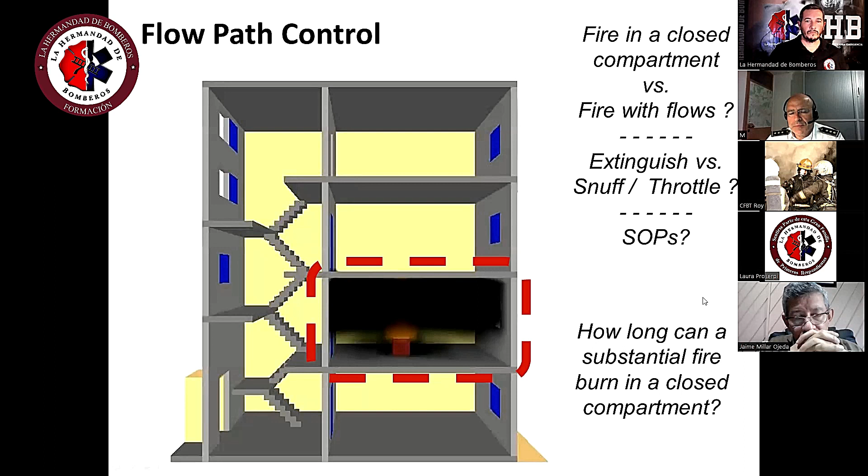And this compartmentation might be broken if maybe windows break or windows are open, or if doors, for example, to the staircase is opened.

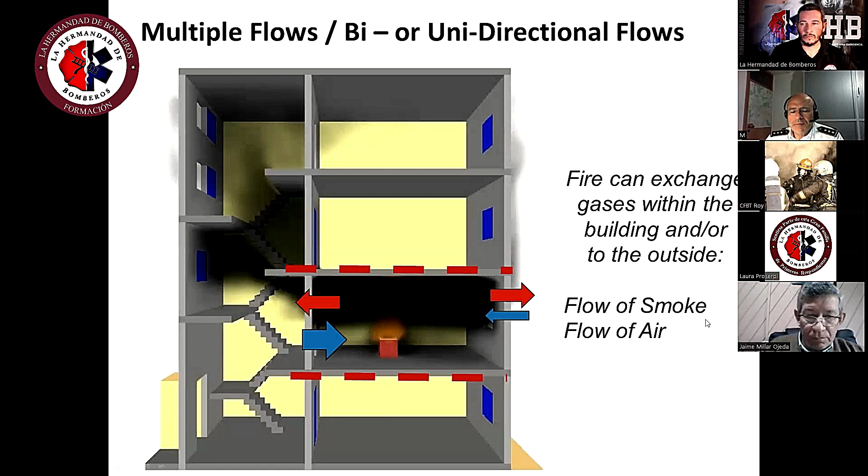So for Germany, we have a lot of key sentences, but the most important thing is the stairway is the most important room in the building, and you always should try to stabilize the situation when you arrive on scene as the fire service against sudden changes, like failure of the window or a flashover or a wind situation. All these fast changes make the situation worse.

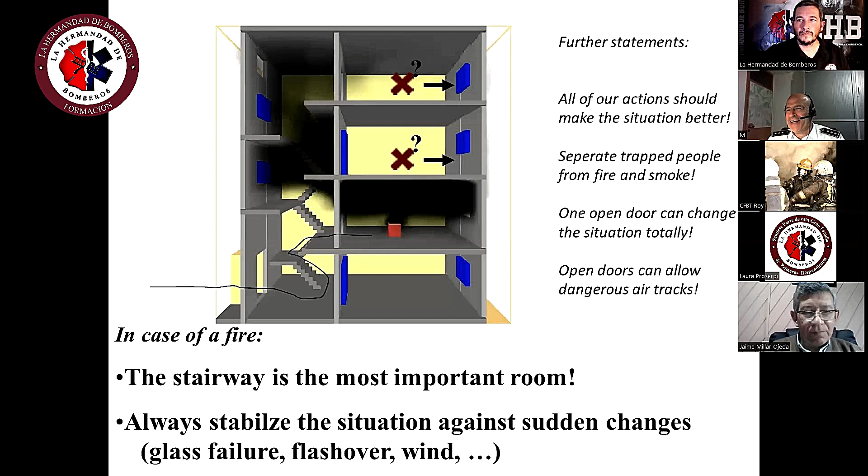I'm just having trouble with my Spanish. Yes, okay. Compartimentación. I got it also.

Yeah, good. Okay, so like a sentence you might hear quite often, the stairway is the most important room in a building, but nevertheless, if you look what fire service is doing all around the world, we have to get access, we have to stretch hoses, we break into doors, and we destroy compartmentation.

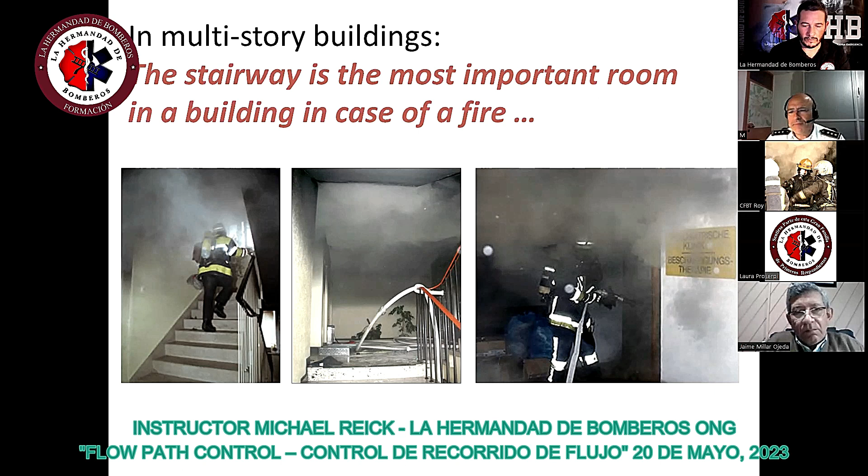So about 20 years ago, I spent a couple of months and did only calculations about smoke spread in multi-story buildings.

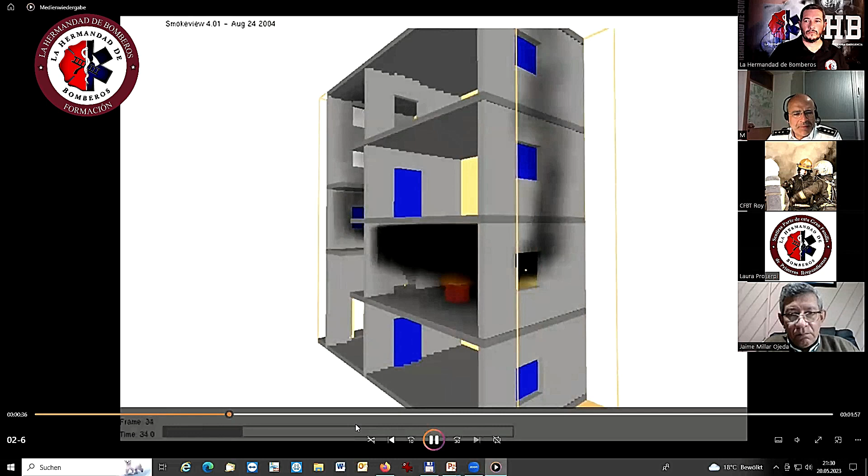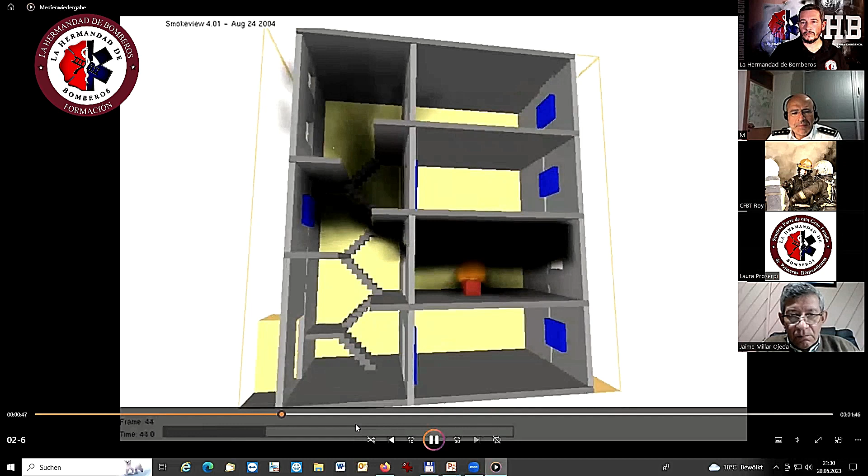And for me, the key point was always how can we prevent smoke spread into staircases?

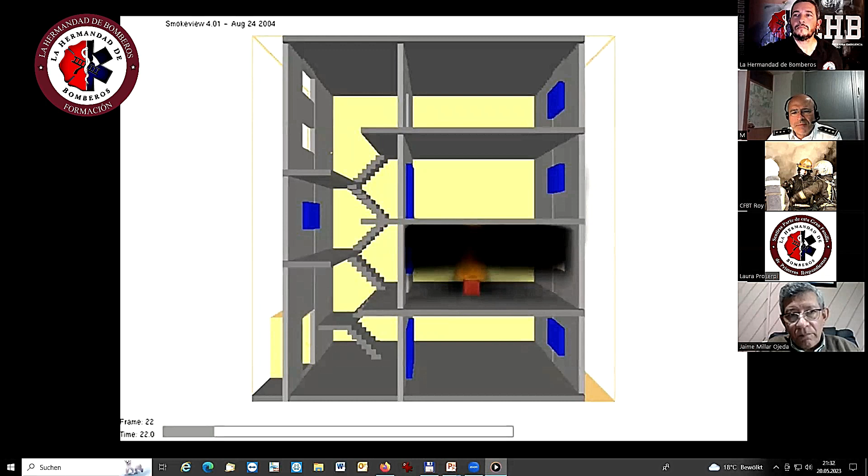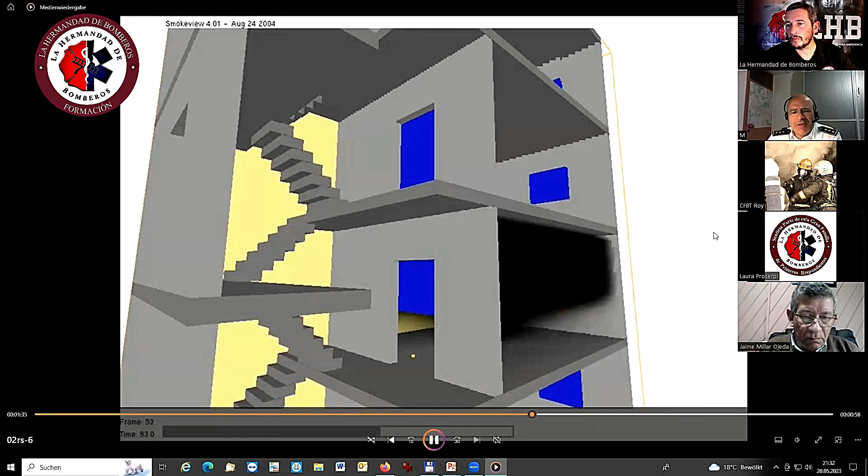And I found that not in 100%, but in most situations, if you keep the upper part of an entrance door closed, you have less amount of air going into the fire compartment, but the air goes in low. You have less smoke spread, and you have much better possibility to keep escape routes smoke-free.